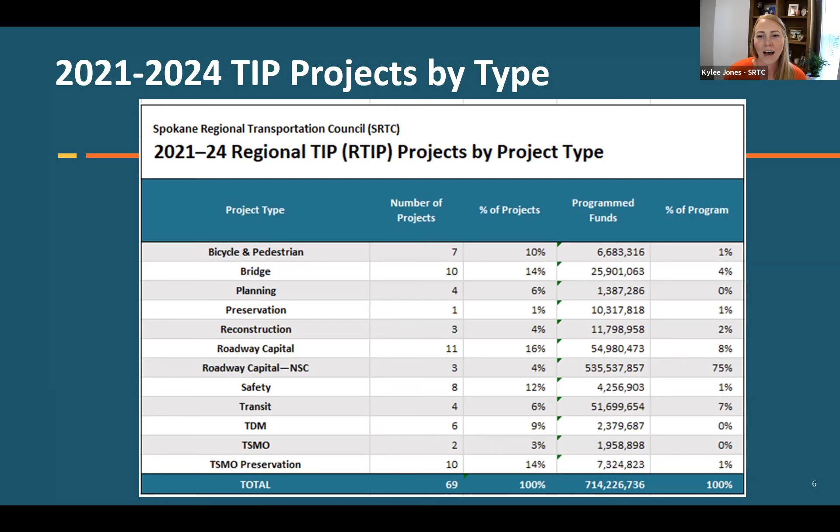So projects include bridge, bicycle pedestrian, planning, reconstruction. You can see the NSC has quite a lion's share of the program funds, which is great. Safety, transit, we've got TDM, which stands for travel demand management, so projects like commute trip reduction and walk bike bus. We also have the TSMO, which stands for transportation system management and operations, so things like signals, signal coordination, cameras. You don't necessarily know when those projects happen, but you know when they aren't happening correctly.

So we do have some consistency requirements for the TIP. As local jurisdictions submit projects to us, we review them against our congestion management process, safe and complete streets policy, and then we also discuss the relationship to air quality and make sure that the program is fiscally constrained, meaning that we can show that there's enough revenue to cover the projects that are included in the TIP.

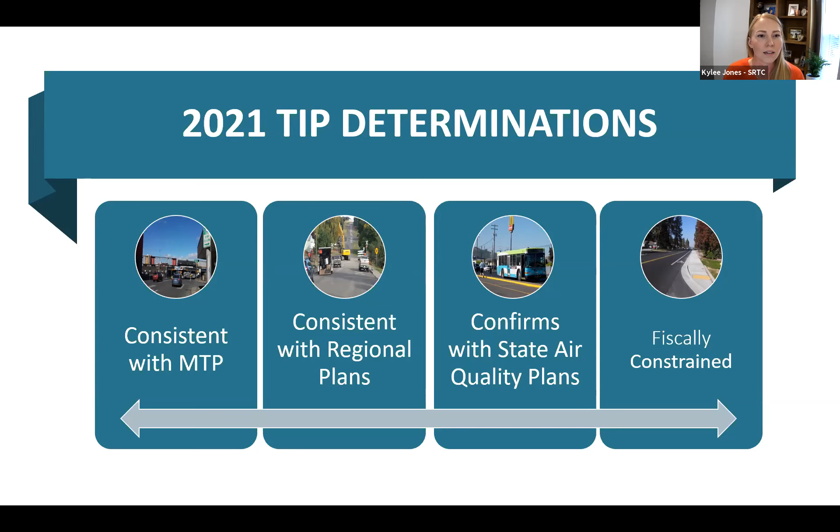Not totally different from the years prior, but again, just the update here. Another recap: the public comment period goes through the end of the month. You can listen to this recording today on our website if you want to come back to it, and perhaps email comments specifically for us if you don't want to use the chat function. But that is all, and I will open it up for questions.

I'm going to give us a couple minutes, maybe a minute for questions, and Eve is going to help me keep an eye on questions as well. I don't see any questions, Kylee, if you want to move on.

Well, thank you. That was a brief summary of the TIP. And I'm going to give the floor to Adam Jackson to hear about the Valley.

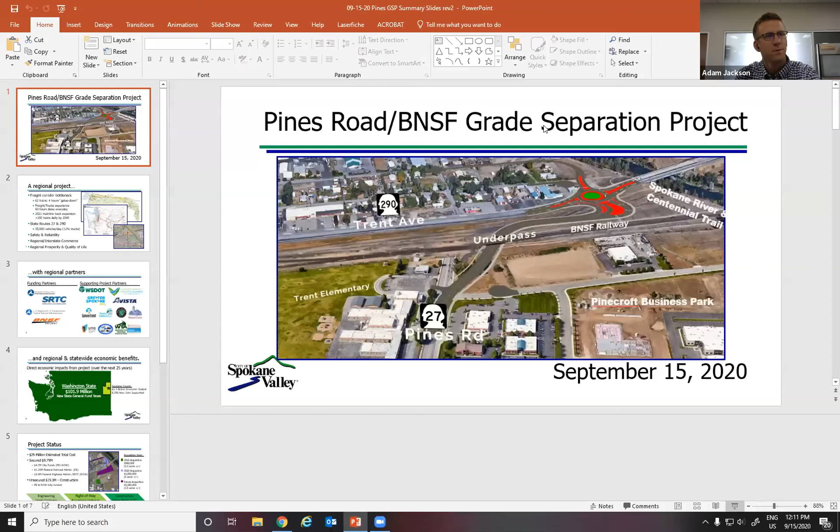With that said, I'll open up the PowerPoint and let's see, nodding of heads. Are we seeing my presentation screen or my next slide screen? Next slides, okay, let me do a little switch here. See if this helps. Nope. Bear with me. Right at the top, Adam, there's a display screens button, and you can just swap those. Okay, I'm gonna try to get back to that. So I think I want that one.

Cover page, thumbs up, Eve. Thank you. So here's an aerial of the project site. Imagine flying over the site. We're sitting above Pines Road looking north, and Trent Avenue is running left to right. You can just make out in the top right corner the Spokane River, and just outside of the picture frame would be Plante's Ferry Park. So we'll stroll through here.

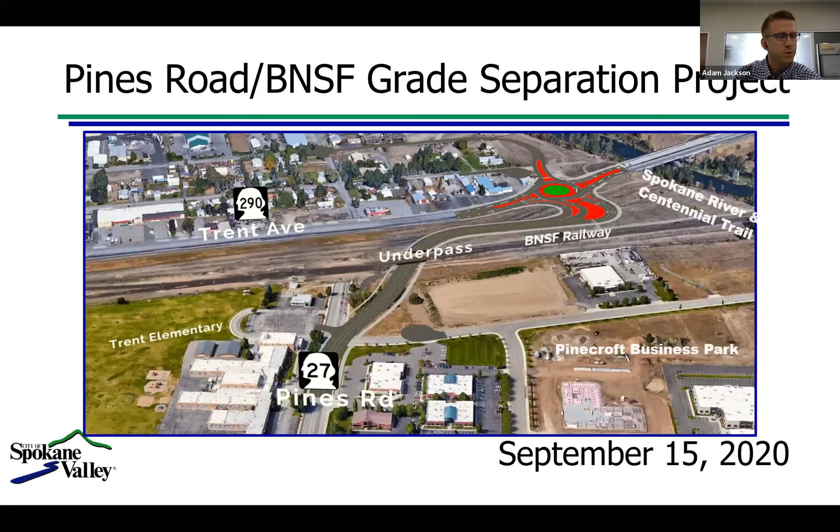So as a regional project, the big impact here is the 62 trains every day that run through the greater Spokane region. At about 3.5 to 4 minutes of stop time for each train, that adds up to about 4 hours a day where users are stopped, arms down, gates down time. That's a big impact to the movement of freight and commerce through the region, and really hinders the prosperity of a user and of the community.

The BNSF corridor, which is part of the Great Northern Corridor, shown here in the top right, the yellow line running from Chicago and Minneapolis over to the western Pacific Coast ports, that is growing actively. What BNSF projects is by year 2040, they'll have over 100 trains running through our region. So that's quite the impact.

And with State Route 27, which is Pines Road, or State Route 290, which is Trent, as those continue to grow, the impact to users is going to continue to grow. That obviously trickles down into the safety and reliability of the transportation network, and really has an impact on all our users, which shows up at the levels of commerce and quality of life. You can see in the bottom right an aerial of the general project area where you have the intersection, but also Mirabeau Park, Centennial Trail Park, Plante's Ferry Park, and the 2 state highways.

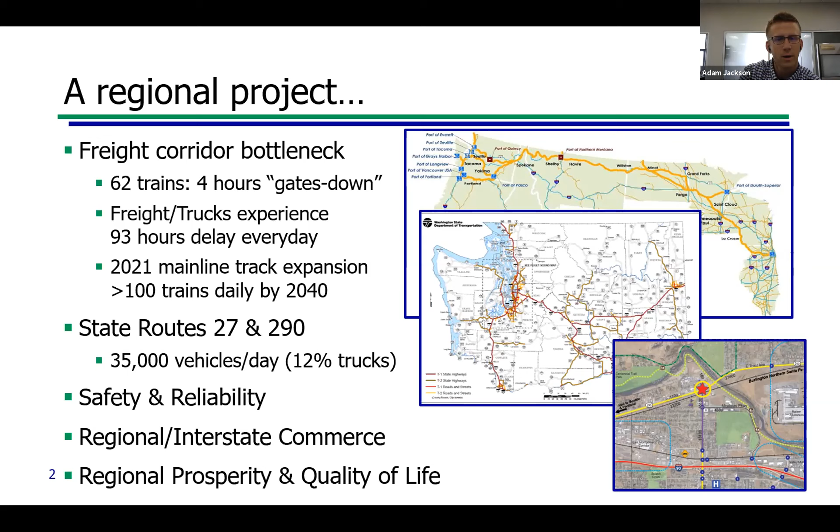A handful of years ago, 3 or 4 or 5 years ago actually, the city worked with a consultant to do an economic impact analysis of this project. This takes a look at the limitations of where this area sits today and how it is limited in its growth because of this grade crossing.

And what that means is to fix the grade crossing and also to fix the signalized intersection of Pines and Trent is almost cost prohibitive for developers to come in and contribute because the cost is too large. And so it's kind of just pushed away development.

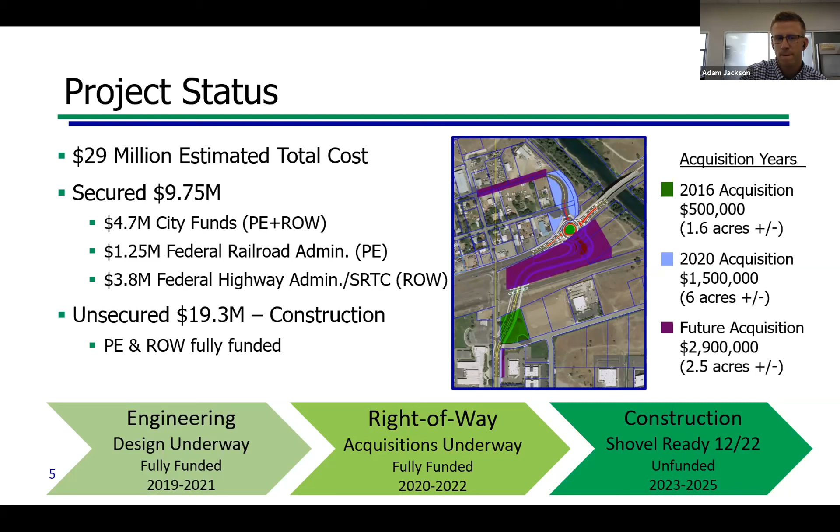Next steps, you can see the engineering and right-of-way are, of course, underway. They're in process, so we still need to work on those and develop them prior to construction. But based on this schedule, we do have that time.

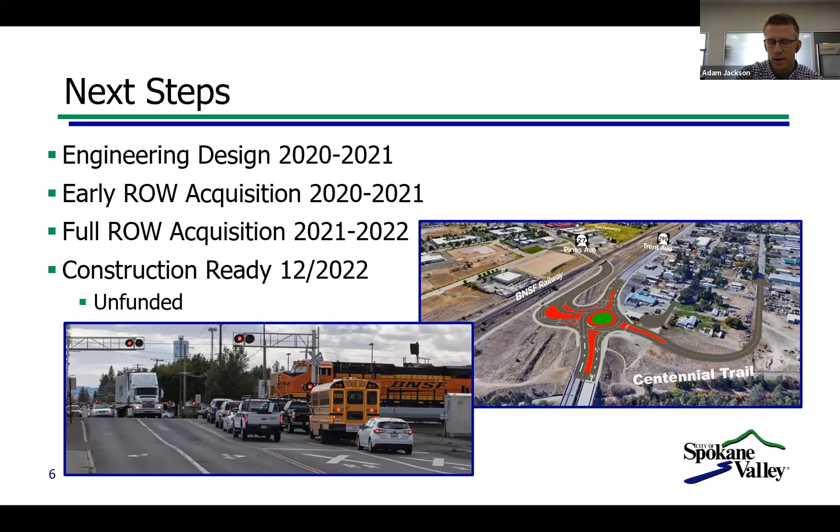Based on funding cycles of state and federal funding programs, this project could lend itself to being a very fundable project as we work through engineering and right-of-way, because with funding cycles being as they are, when we identify a project today, there's obviously time until those dollars are cut loose. So this is theoretically a construction-ready project come December of 22, January 2023.

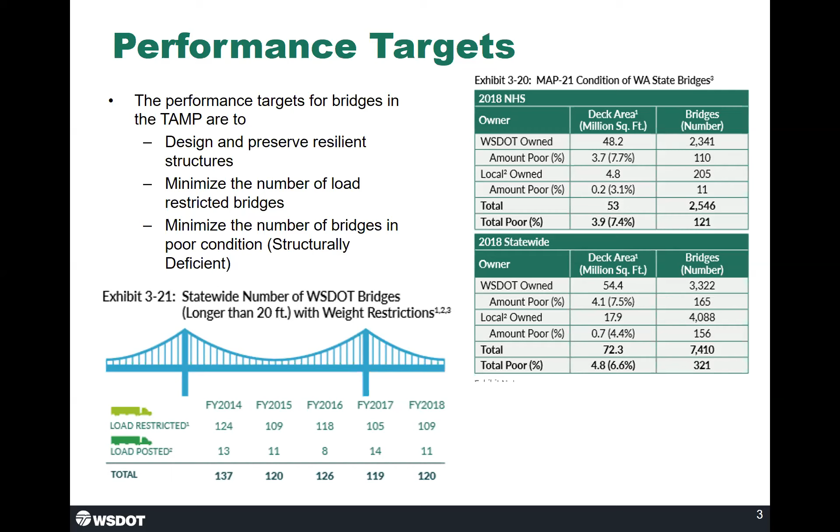For Spokane, Trent Bridge actually belongs on both of these lists. It was in poor condition as well as load restricted. So that's one in the immediate area you can go see was on these two lists.

So the funding levels for preservation needs are very low, critically low for the next 10 years. Our approach is to extend the life of the entire system as much as possible. However, we do recognize there will be widespread failures at these critically low investment levels. So what we need to do is identify priority routes, and that'll be the focus of our limited preservation funds.

As you can see from the bottom graphics, the 2-year and 10-year funding deficits: for the 2-year in bridge it's 1.1 billion, and over the next 10 years it's almost 2.3 billion as a max.

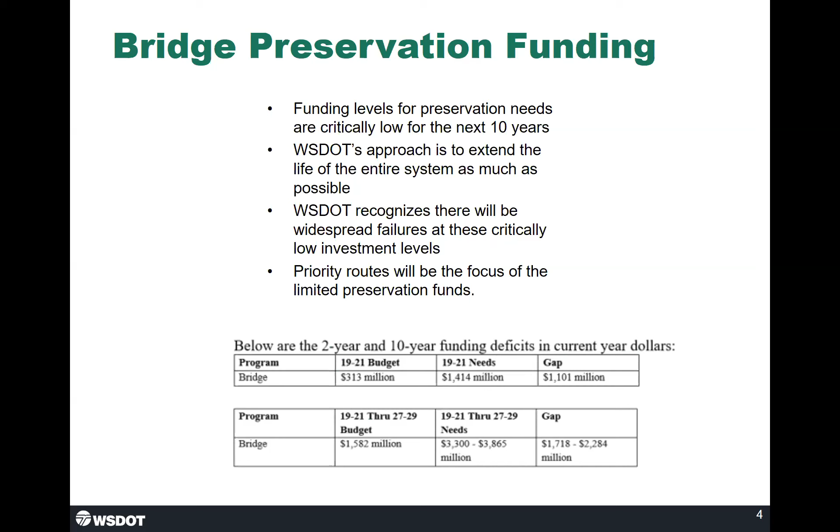So why is there a preservation funding deficit? Well unfortunately, when we did our revenue projections, which look at all sources of WSDOT revenue coming in, it was way too optimistic for what actually did come in from sources such as the gas tax. That just never materialized. We are about $10 billion short from that optimistic revenue projection.

And also the passage of Initiative 976. In 2016 they passed a law to raise the car tabs to above $30. Then in 2019 we actually passed another law to lower it. Initiative 976 actually lowered the car tabs. So between 2016 and 2019, that revenue actually budgeted other projects, and we no longer have that future revenue.

And then COVID-19 caused approximately $1 billion to $1.2 billion in reduced gas tax revenue because everybody's staying home. So with all of those things, we're about $15 billion under where we should be for funding our various modes of transportation at WSDOT.

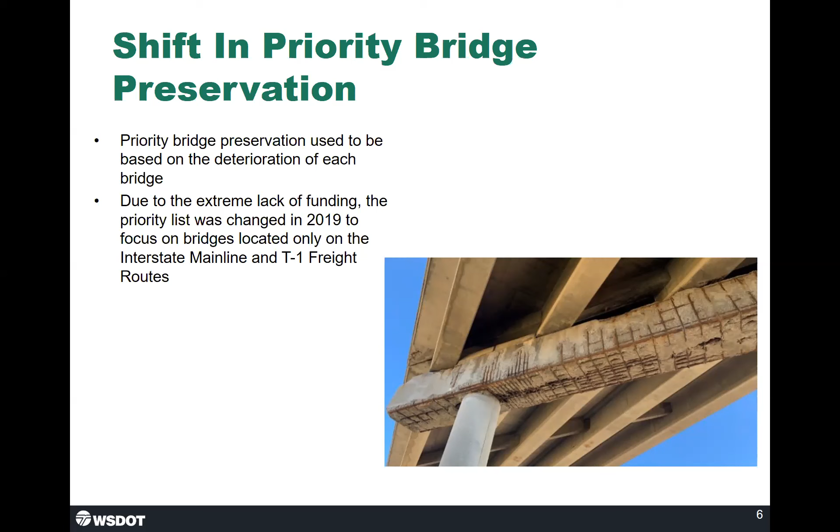So what are the consequences of the shift in priority from focusing on the actual condition of the bridge to only focusing on bridges along I-90 and on those T1 freight routes? Well, this bridge is in Spangle, down on 195, and as you can see it's actually in poor condition. We were going to close it down, at least one lane, and a detour to get around this bridge would take many, many miles. So one of the consequences of these bridge closures and routes taken out of service is we're going to have these long detour routes that will adversely affect the flow of freight and people.

We also understand there's going to be economic and societal impacts associated with the closures, and these could be hundreds of millions of dollars per year. Finally, the cost to reopen these closed bridges will be 3 to 5 times the amount we could spend today if we preserve them now.

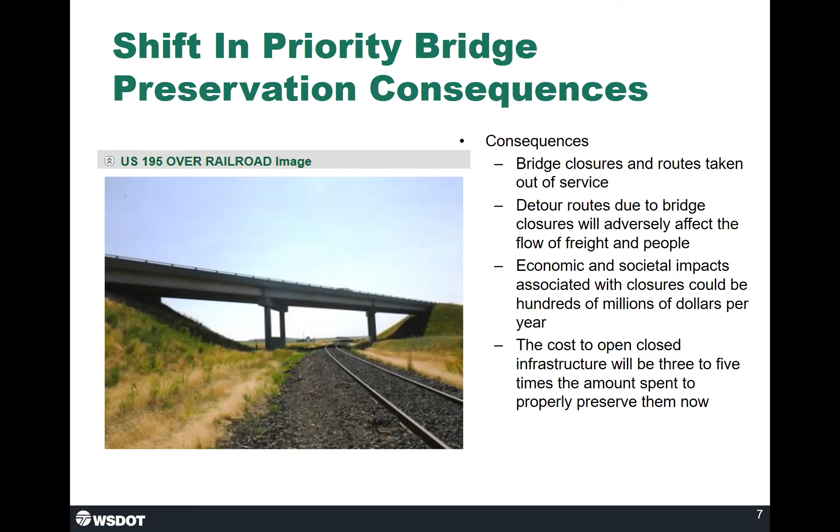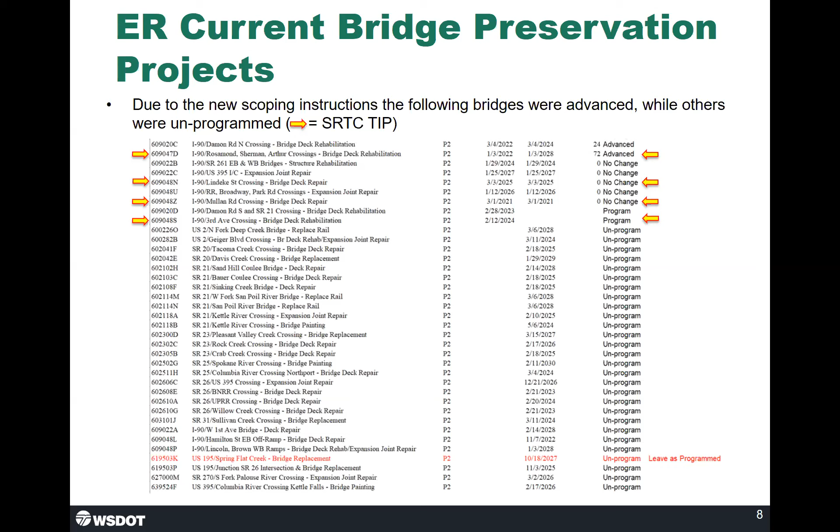The yellow arrows are the 4 bridges in the SRTC TIP. As you can see, a few have been advanced, some show no change, and some are programmed. A no-change means the bridge was already programmed, was in poor condition, and we kept the ad date the same under the new rules compared to the old rules. Advanced means the bridge was in better shape and scheduled far away, but because it's on I-90, it was advanced. Programmed means the bridge wasn't in the 10-year program before, but was added. So I'm going to go over the 4 bridges in the TIP.

First, on I-90, this is the 3rd Avenue Crossing Bridge, deck repair. This bridge was not in the 10-year plan, but because it was on I-90 they put it on the plan and we will be doing it. It's in medium condition - I wouldn't consider it poor - but this will be one of the bridges we work on because it's on the I-90 corridor.

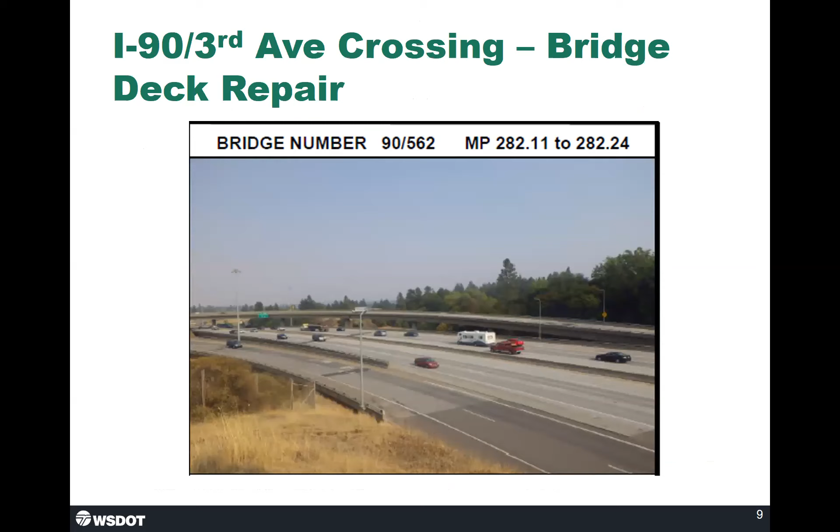Lindeke Street crossing, we're going to do a bridge repair on that. It's over I-90. Lindeke is in poor shape, and we actually had it in our 10-year program already, so it wasn't changed - the ad date is the same as before the new changes - so we're going to do that repair since it's in poor condition.

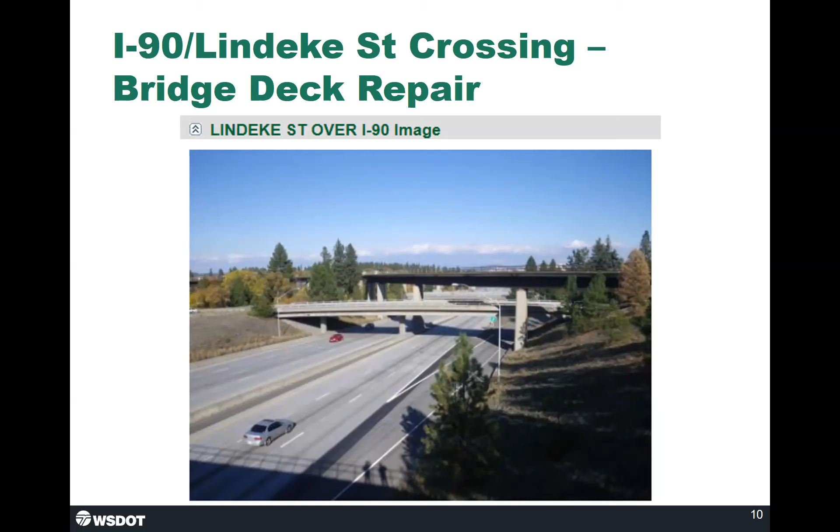Mullan Bridge is also going to be repaired. It was in our 10-year plan, it is in poor condition, so it hasn't changed at all. The ad date is the same as it was before they made the new rules, and we will be repairing that.

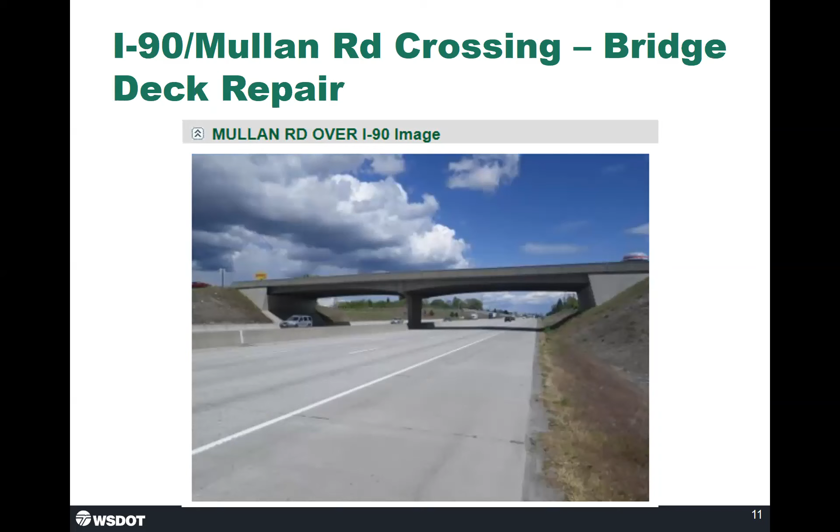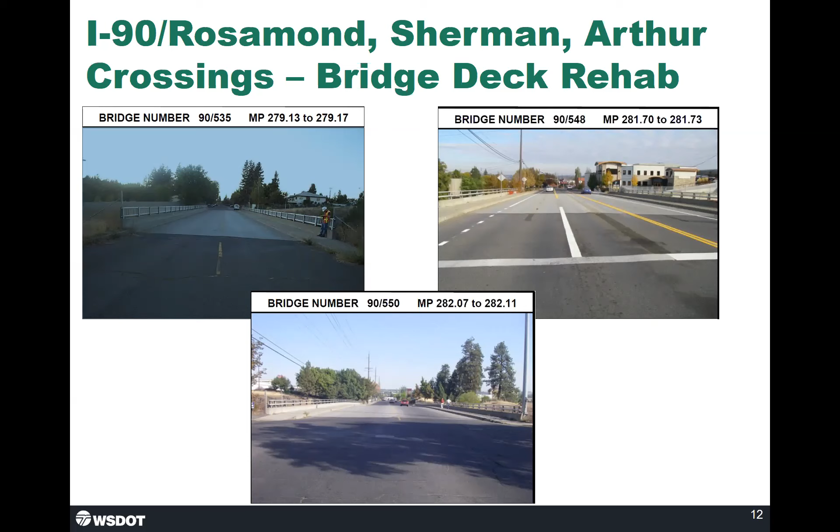So I'd like to talk about what that means for our communities in the Eastern region. The northern counties in the Eastern region are some of the poorest counties in the state. They have tribal land and low economic output due to the decline of the resource-based jobs they used to enjoy. Our southern and western counties are home to the wheat industry of the Palouse region, which relies heavily on the state system for transportation. So as you can see, if those bridges fail in the northern counties, it's really going to impact those poor communities.

And we really need to think about ways that we can help those communities and try to get these bridges repaired, maybe making them more of a priority.

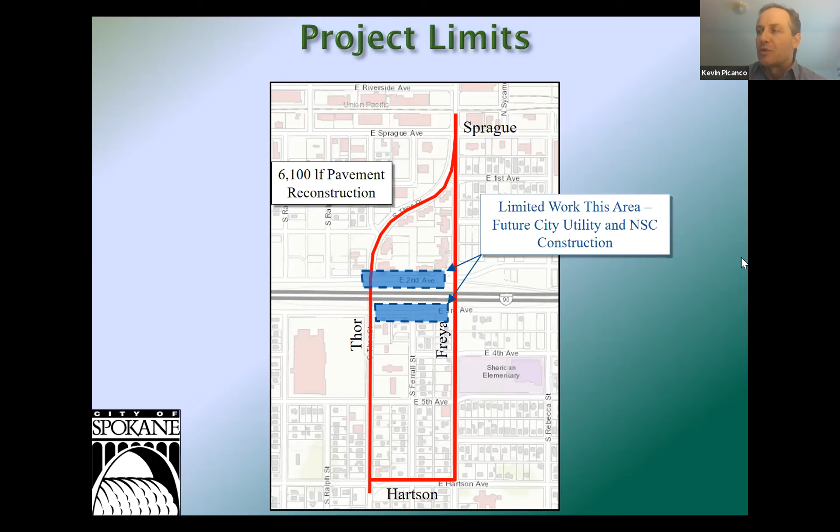We are highlighting here that there will be some isolated locations where our work won't be included or done. For instance, at the Second Avenue and Thor intersection, there's some future and upcoming utility relocation work related to the NSC freeway. That work will occur in the future, so we don't want our concrete improvements here to be torn up by that future utility work. So first, some background information on the overall corridor.

This corridor sees as much as 40,000 trips a day in certain segments, combined between the Thor and Freya legs of the couplet. This is our highest volume corridor, serving both the South Hill and Northeast Spokane. And the northern portion of this project segment, north of I-90, is designated as a T1 freight route, which is the highest freight designation.

In terms of pavement condition, it varied by segment, but was rated as low as 34 in certain areas of the roadway. That was prior to the 2017 overlay that was done. That overlay was really a stopgap measure. With our winter of 2017, we saw a lot of degradation across our roadway system, and there was a need to do some stopgap work just to make it a drivable surface. But we're not anticipating that it will hold up for a significant period of time, which is why we're doing this project.

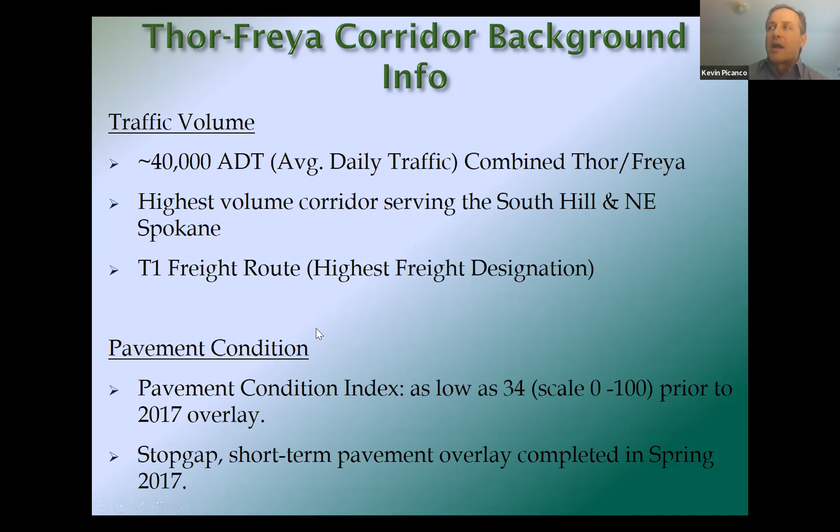So our primary objective here is really to improve and upgrade the pavement condition through this heavily traveled and critical freight corridor, to improve that structural section that really just isn't adequate.

What exists out there today really isn't adequate to handle the traffic loading, especially the heavy vehicle volumes that exist. So our strategy through this stretch is to use a Portland cement concrete pavement. That's a longer life pavement as opposed to typical asphalt. It's a little more costly, but it should last much longer. Those who've traveled the corridor know that north of the railroad tracks, north of Sprague Avenue, Freya Street and then Green Street are already paved with a concrete pavement section, so this work will tie right into that, giving us a longer length of PCC pavement.

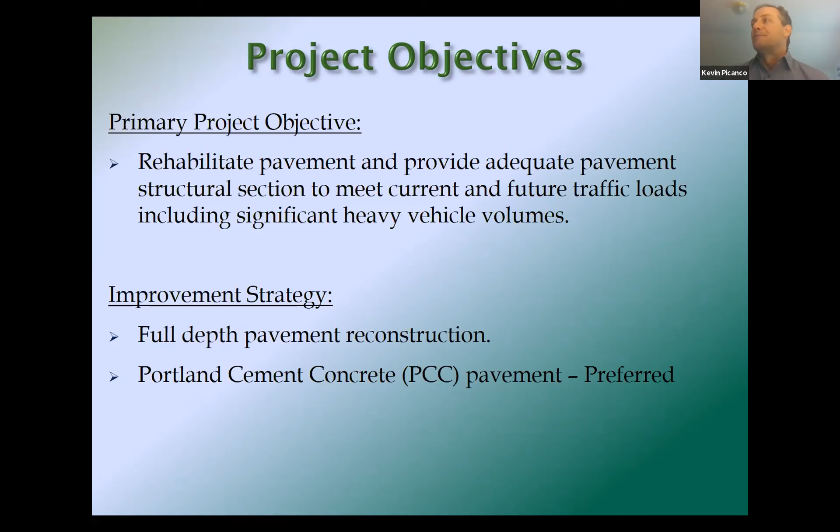Some secondary project objectives - these are all kind of incidental or ancillary to our main purpose for doing this project. But as we do with most of our projects, we have to upgrade ADA curb ramps where they aren't compliant with current standards. There's some isolated areas where we will repair curb and sidewalk.

We'll look for opportunities to separate stormwater. We have a couple blocks we've already identified on Freya Street where we can separate the existing stormwater system that today goes into our combined sewer system. So we will do that wherever we can.

We have some minor improvements to traffic signals. The signal systems that you see today will mostly remain as is, with some minor upgrades and modifications. We're still considering whether we're going to add some additional roadway lighting in between intersections. There's of course roadway lighting at intersections today, and we may increase the amount of lighting within the corridor. That's still to be determined.

And then there's some isolated locations where we'll look to install a little bit of landscaping, both as beautification and potentially within our stormwater treatment areas as well. And then we'll upgrade some older utilities that are within our project limits.

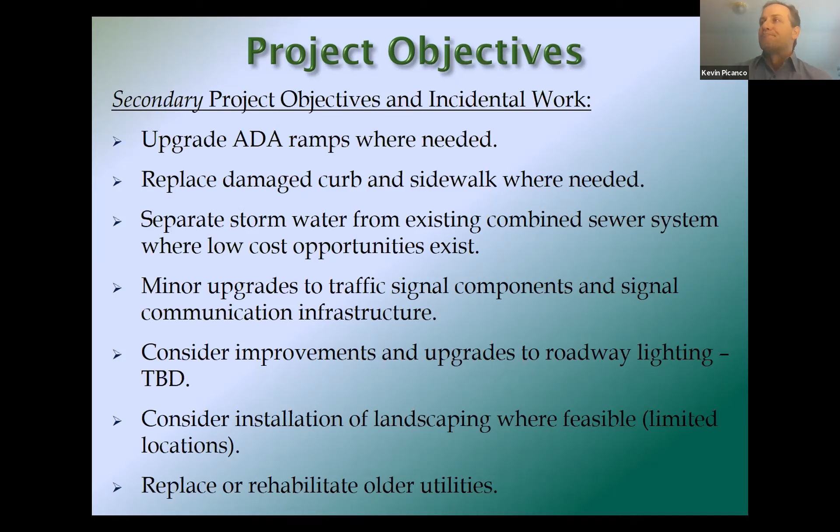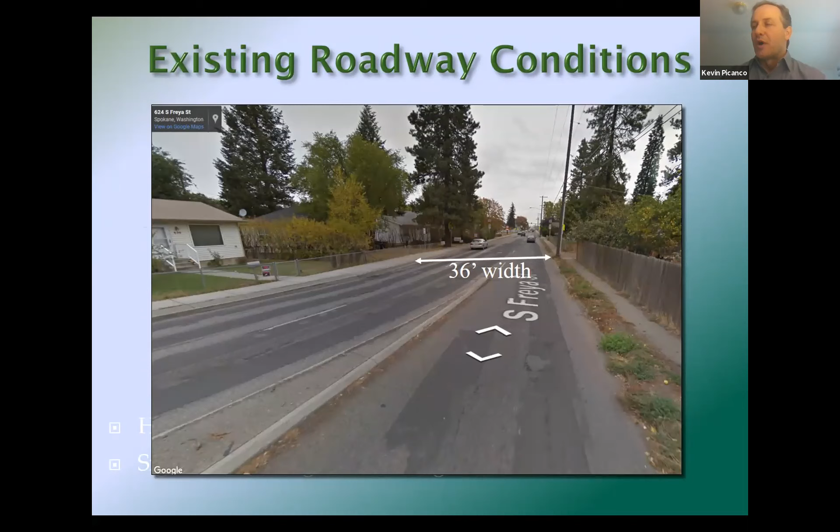So just a couple quick snapshots. These are photos from prior to that 2017 overlay, but it illustrates a lot of the patches and pavement repairs that were having to be done just to eliminate potholes, as stopgap measures. A lot of cracking, a lot of pavement failures throughout the corridor. This particular picture is on Freya looking north from Hartson, and then again on Thor you saw similar conditions through there as well.

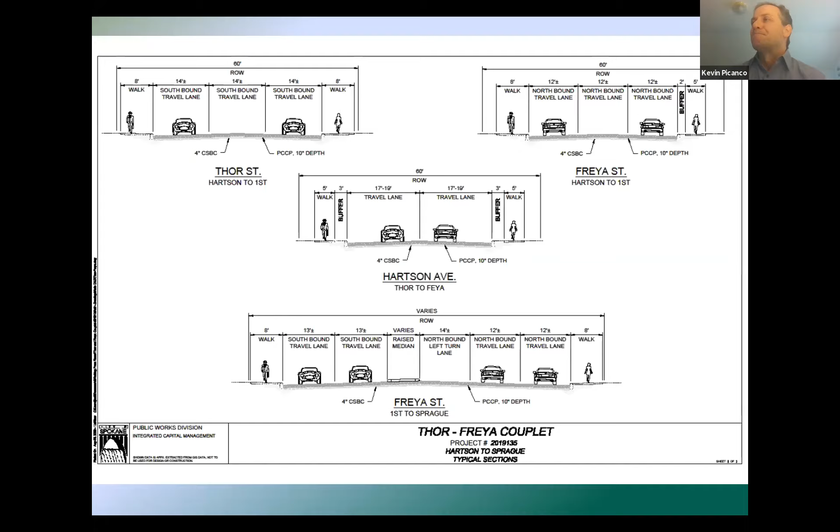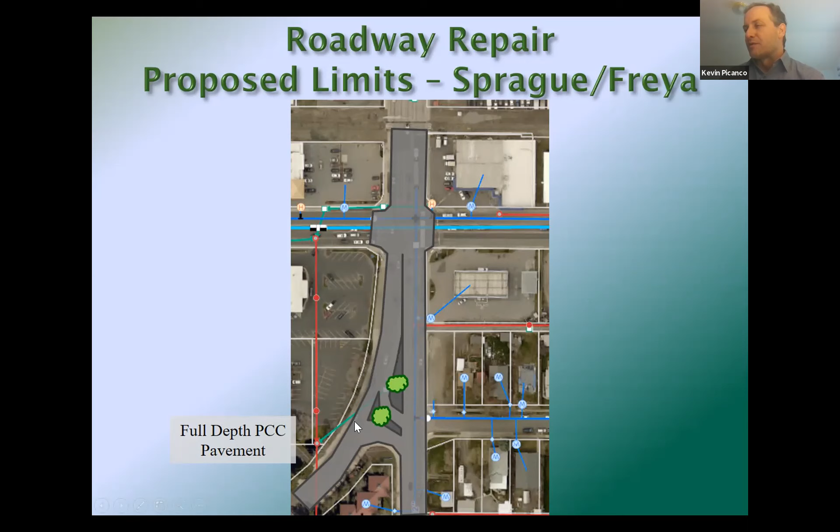So I just wanted to use this slide to highlight some of these areas where we might be able to do a little bit of beautification. This is very much sort of cartoonish or concept level, but just up in the vicinity of Sprague and Freya where the couplet comes together, there's some medians that will have to be reconstructed as part of this work. We'll look for opportunities to add maybe some landscaping in those.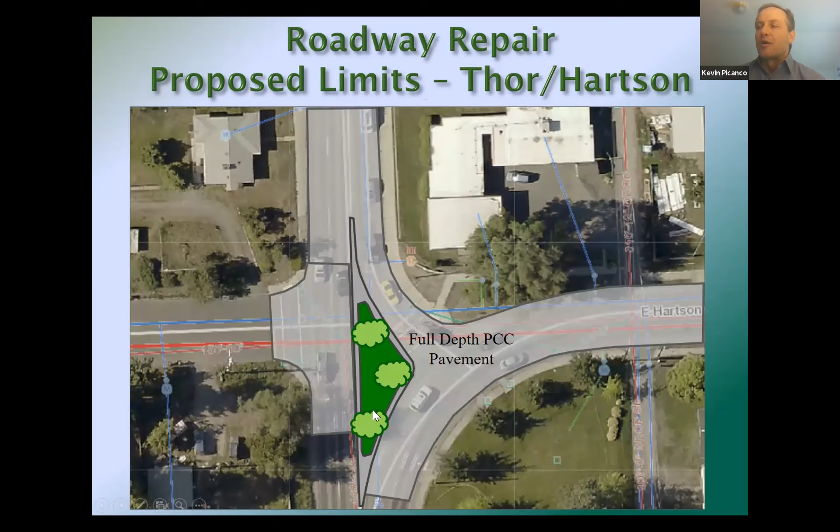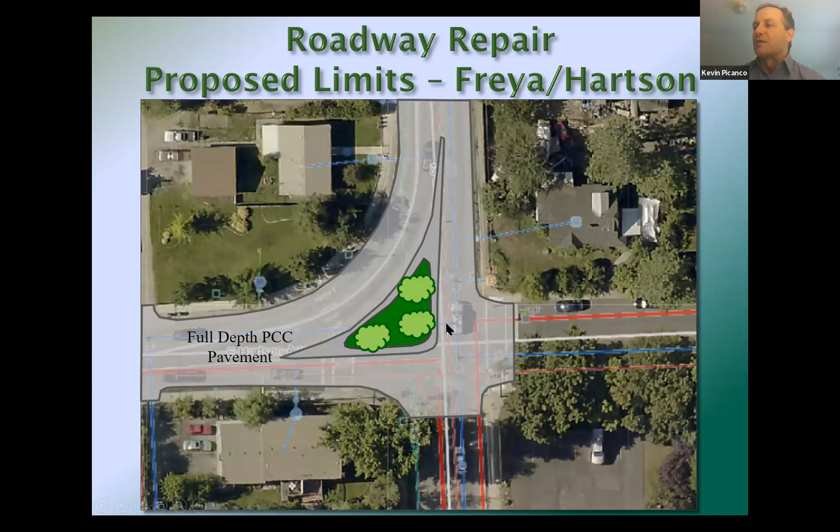And then down to the far south of our project limits, this is at Hartson and Thor. Again, there's an existing concrete median island there, and we may look to install some landscaping in that island. Similarly over on Hartson and Freya, that concrete island there will also have to be reconstructed, and we'll look for opportunities for landscaping there as well.

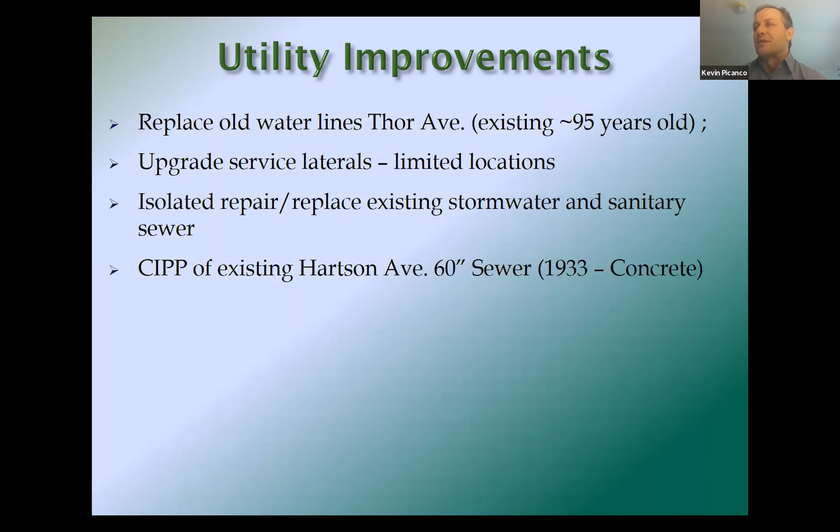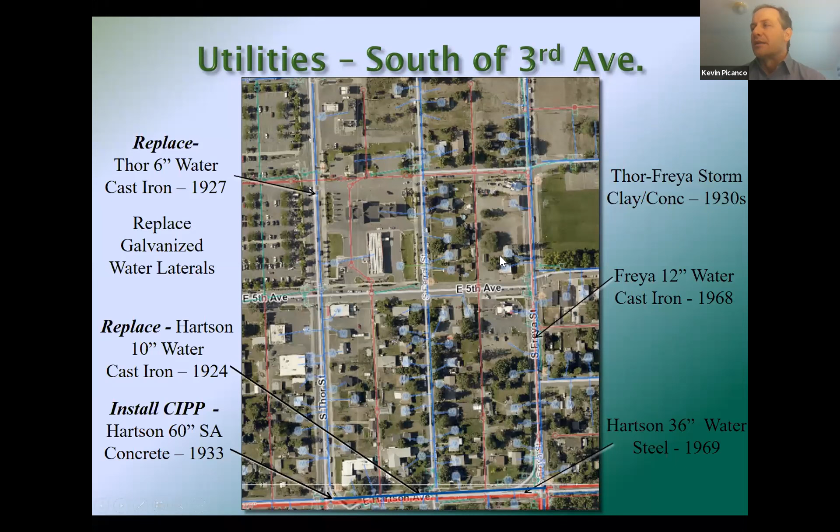Just quickly highlighting the utility side of things, we have a lot of older utilities, particularly south of I-90. Because this is a concrete pavement section that we're planning, a longer life pavement, we don't want to be out there in 5 or even 10 years tearing up that concrete pavement to replace or repair some older utilities. So this graphic just highlights that. We have a couple older water lines that'll be replaced, primarily in Thor. Along Hartson, we have an existing large 60-inch sewer interceptor that we will install a lining in, which will extend the useful life of that. And then there'll be some isolated replacements and repair to other utilities within the corridor.

In terms of project costs, we're still at the early design stages of the project, but early preliminary costs are showing around $11 to $12 million in total project costs. As of now, our funding sources are SRTC, which awarded the city a federal aid grant of $8.3 million in the last couple of years. We have $1 to $1.5 million set aside from our arterial street levy dollars to help with the funding for this project. And then the utility improvements will be funded by the utilities, with those costs estimated at a little over $2 million as of now.

In terms of schedule and project status, design got underway earlier this year on this project. The NEPA document has been prepared and approved. We've recently moved forward with our right-of-way acquisition phase. We don't have a significant amount of right-of-way to acquire—these are mainly small sliver takes at intersection corners where we have to modify ADA ramps, since the footprint of those ramps is a little larger than what's out there today. So a little bit of property acquisition is needed at several locations, and that work is underway.

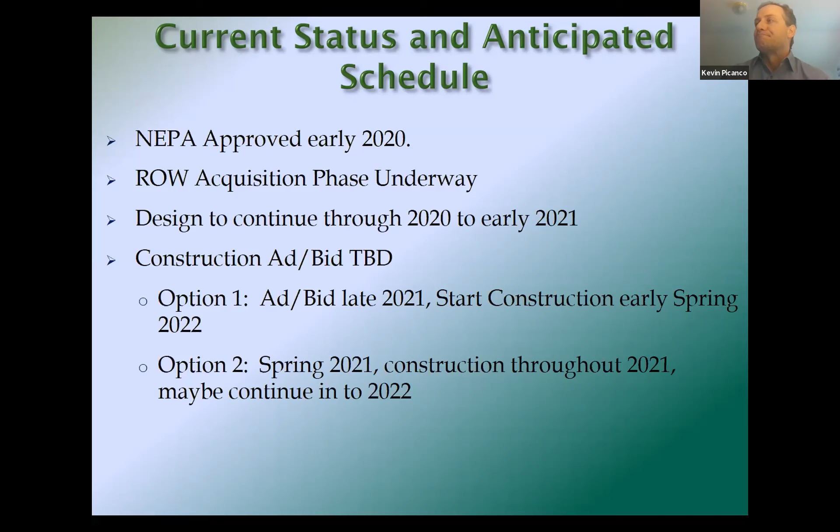So with that, I'd just like to open it up for any questions you may have. Thank you, Kevin. I don't see any questions quite yet—maybe we'll give it just a minute.

I do have a question for you. The type of concrete pavement, as you described it, how is that different from what is out there currently?

So, yeah, what is more common on our streets today is paving with asphalt concrete—that's what's out there today. You have an aggregate base, and then asphalt on top. The example of the concrete is what exists on Freya, north of Sprague Avenue. Once you cross the railroad tracks, that's all a Portland cement concrete pavement section, which is what we would do on this project as well. That's Freya north, all the way to the river where it turns into Greene Street in front of SCC—that's all paved with PCC concrete today. So we would follow that same approach.

Great, thank you. It looks like we have a question: During construction, will Thor and Freya be constructed during alternate years in order to keep traffic partially open?

The traffic control strategy—there's still a ways to go before we get to that point of making that decision. They're still in the early design phases of their work. That's certainly under consideration. It's possible we could break the bid into two different packages or contracts to get the work to go faster. There's even some consideration, or someone suggested considering, converting back to two-way operation temporarily during construction—for instance, Thor would go back to two-way and you'd close Freya down in order to expedite construction on Freya, and then flop the work. So all those strategies, both in terms of the contracting strategy of one versus two contracts and that traffic control, are still to be determined, and that partly relates to and plays into those different schedule scenarios I mentioned.